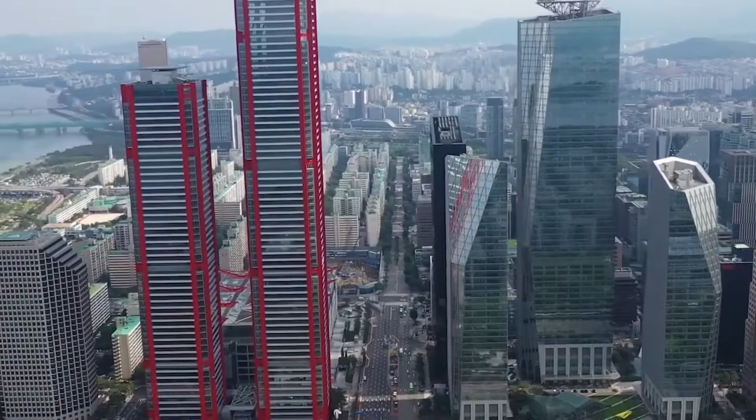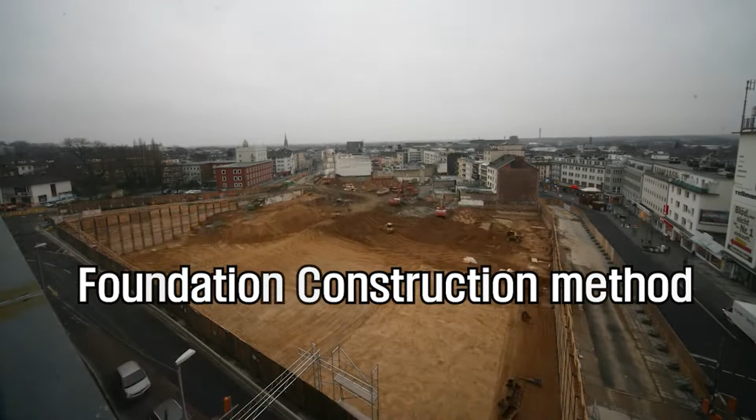Team 2, and this is our Week 8 project about the Hyundai Seoul. We gave a foundation construction method of the Hyundai Seoul last week. This week, we are going to give you the structural construction method. Our topic for this week is Hyundai Seoul's base structure and core.

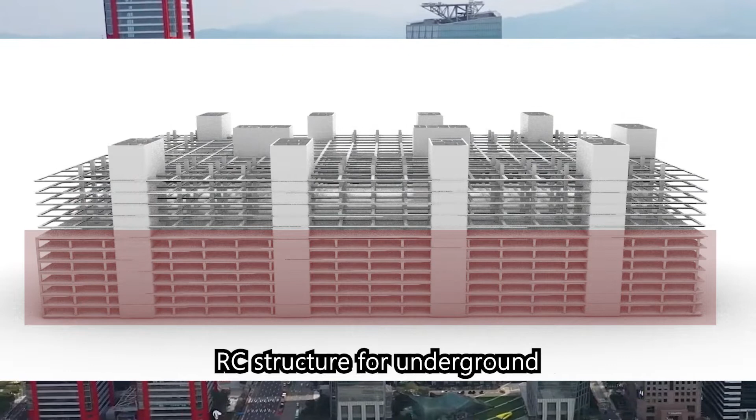The Hyundai Seoul's framework is largely divided into two sections: the reinforced concrete structure for underground and the steel structure above ground. First, let's look at the RC structure underground. The 7th floor to the 2nd basement floor is a flat slab structure using reinforced concrete because of its economic feasibility.

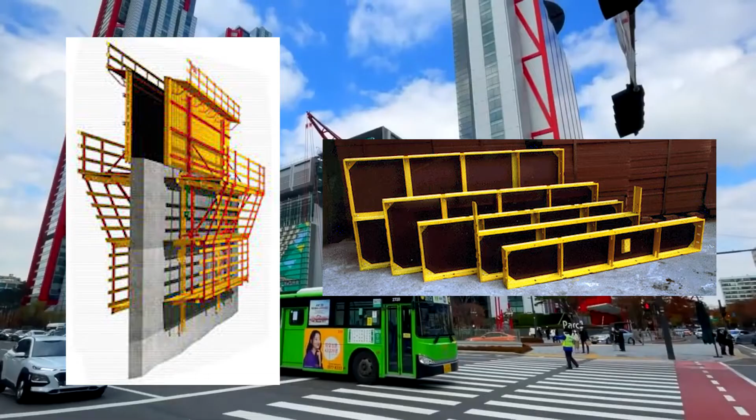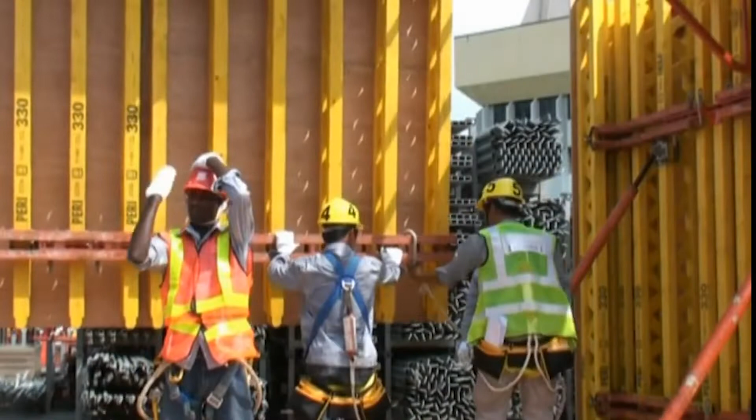The structure consists of an 8.4 meter square grid unit with beams and columns, and the concrete was placed using the system formwork method and the Euroform method. System formwork refers to a form that integrates, unitizes, and enlarges the formwork in advance along with the supports that reinforce it. There are many advantages in construction management, such as securing the precision of the frame construction and shortening the construction period through construction simplification.

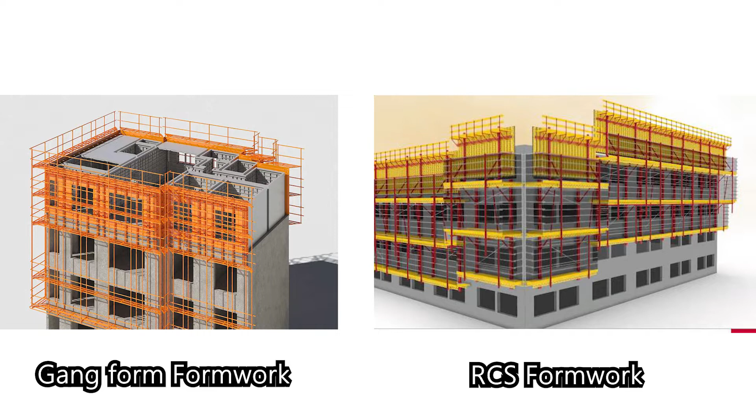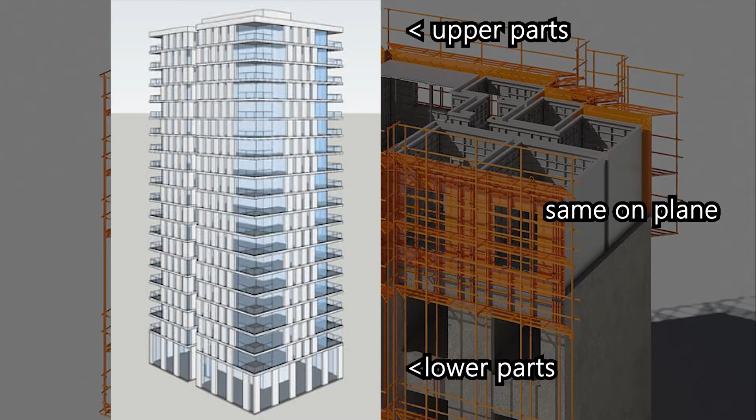In particular, gang form formwork and RCS formwork were used in the basement construction of the Hyundai Seoul. Gang form refers to a large formwork made by integrating an outer wall mold and a scaffold cage in a cross-sectional structure with the same upper and lower parts on a plane, such as in high-rise apartments. RCS is a working scaffold for wall formwork, an integrated rail system that combines the working scaffold for formwork installation, the scaffolding frame, and the finishing scaffolding after placing concrete.

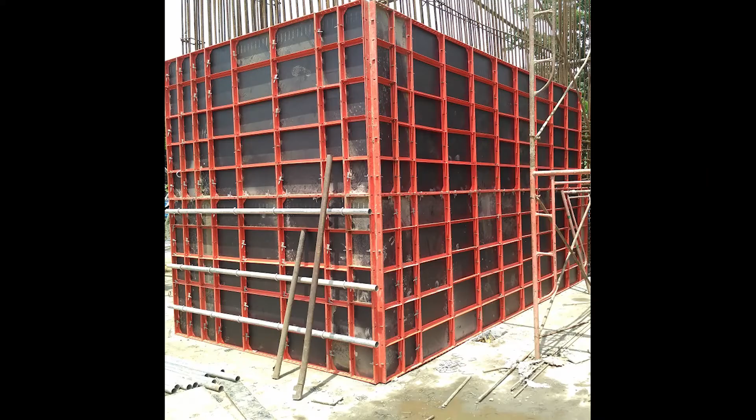The Euroformwork system is a standard form in Europe, and it is the form most commonly seen in the domestic field. Usually 600 by 1200 mm is the basic dimension, and there are several types by size. The spacing of the steel frame inside the form is 300 mm, and the wedge pinhole for assembling or bonding between forms is drilled every 150 mm.

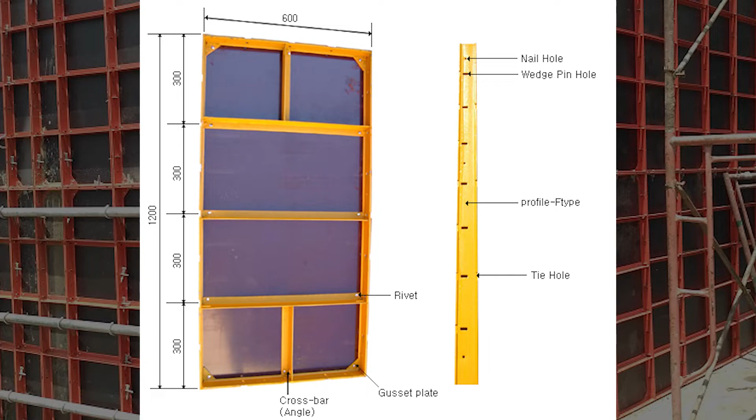This RC structure uses high-strength rebars, and an economic evaluation was conducted to select the appropriate rebars. This resulted in the use of high-strength rebars of SD500 above D13 and SD600 above D16. In addition, concrete combination tests were conducted directly at the construction site, and the proper specifications were selected for the environmental conditions.

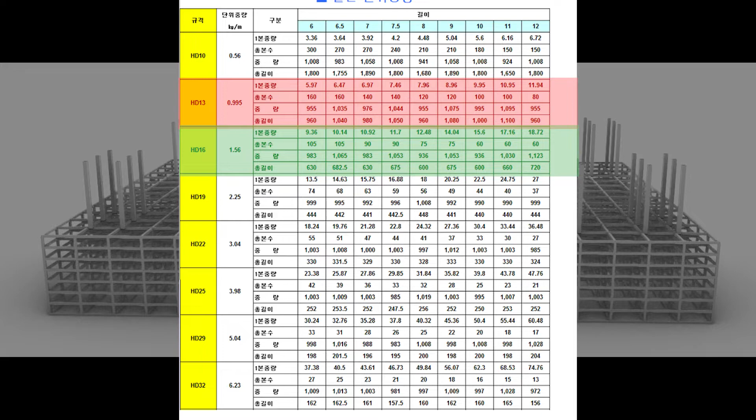As the construction of the basement floor proceeded, the core walls were built at the same time. A total of 11 cores were constructed one floor earlier than the slab layer by using the gang form method. Next, let's look at the structure on the ground.

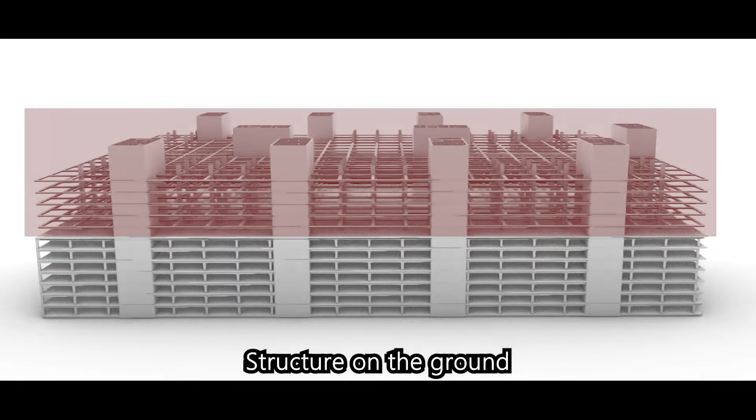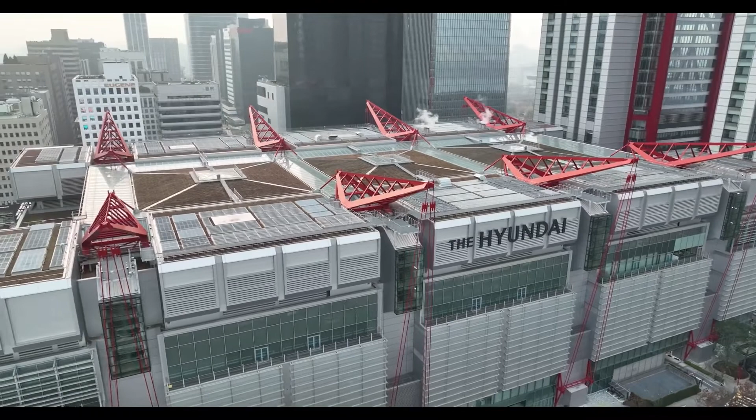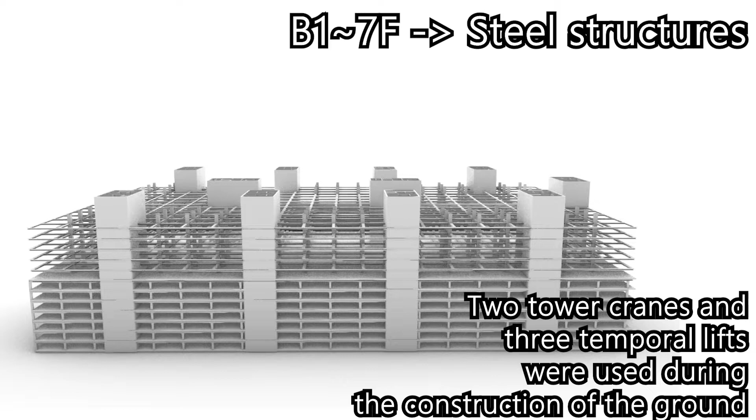The ground floor of the Hyundai Seoul consists of 8 cores and a steel frame, and a large steel structure is installed on the roof to realize an indoor space of 50 by 50 meters. The first basement floor and the ground structure were constructed with steel structures. 2 tower cranes and 3 temporary lifts were used during the construction of the ground floor and remained to transport material until the 3rd floor structure was completed.

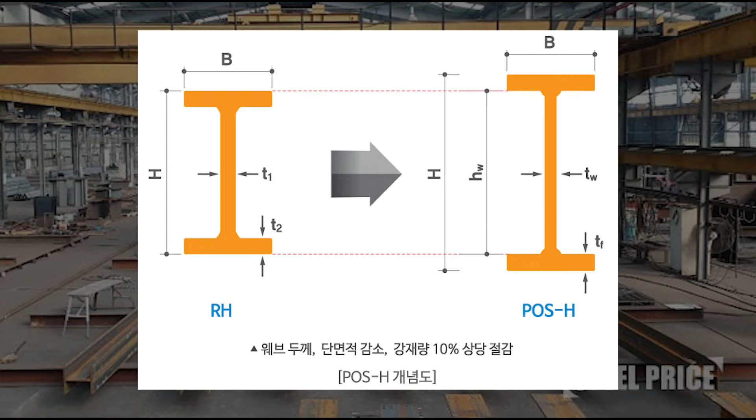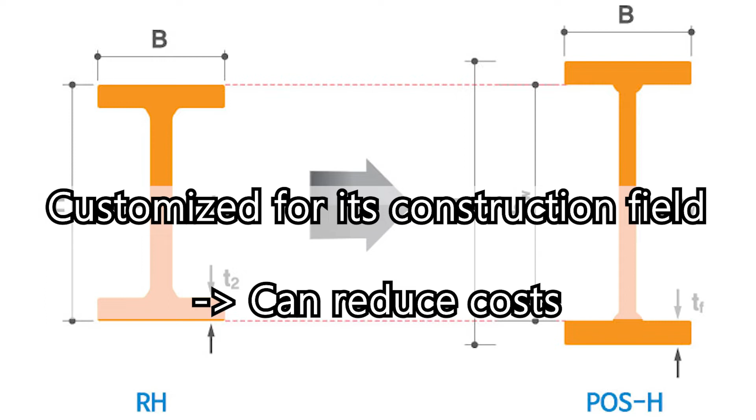In general construction, rolled H-beam is commonly used for steel structures, but in this project, a special steel frame called POS-H, developed by the constructor POSCO E&C, was used. Unlike a conventional standard H-beam, this POS-H can be customized for its construction field, so it can reduce costs since the constructor can use the exact size they need.

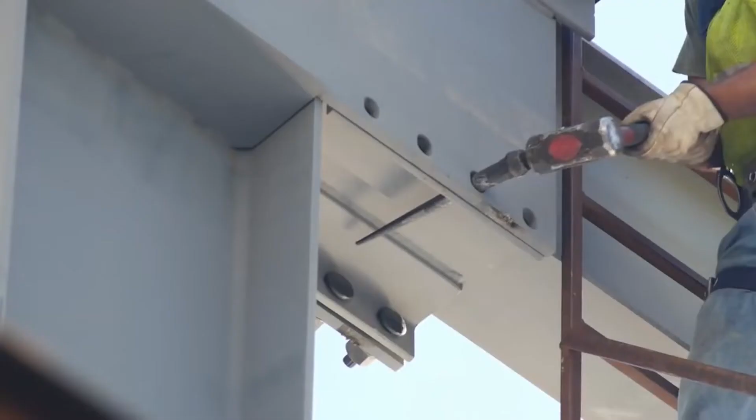In particular, the beams were designed as hybrid beams through collaboration with the KSSC. The flange part of the beam member was designed with high-strength TMCP steel, and the web part was designed with general steel. On the other hand, various methods of bolting and welding were used for joining steel frames.

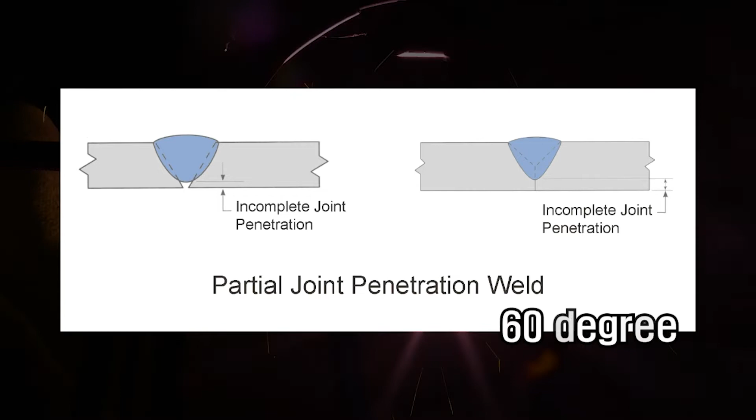For general members, bolting was used to shorten the construction period, and welding was used for large members that could not ignore construction errors. Especially for welding, the angle of PJP was 60 degrees before the suspension of construction, but it was changed to 45 degrees through WPS, saving welding time and cost.

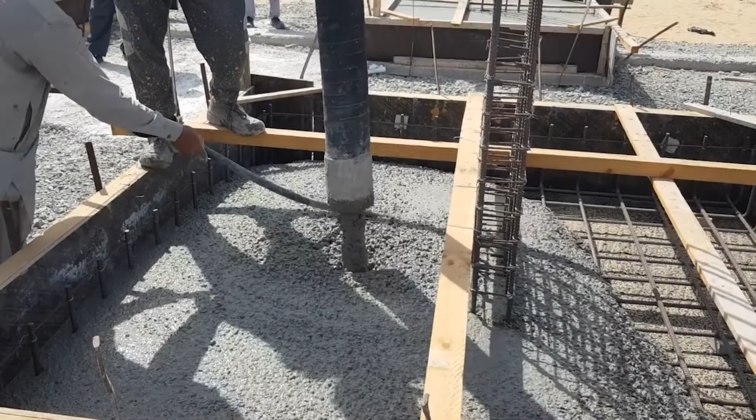As we can see, the structural methods of the two sections are different, so the transfer girder was required to transmit the load on top to the lower structure. The thickness of the transfer girder is very thick, 1 to 2 meters, so there were some cases to divide the pouring section, for example when the amount of ready-mixed concrete is insufficient, or the load needs to be divided.

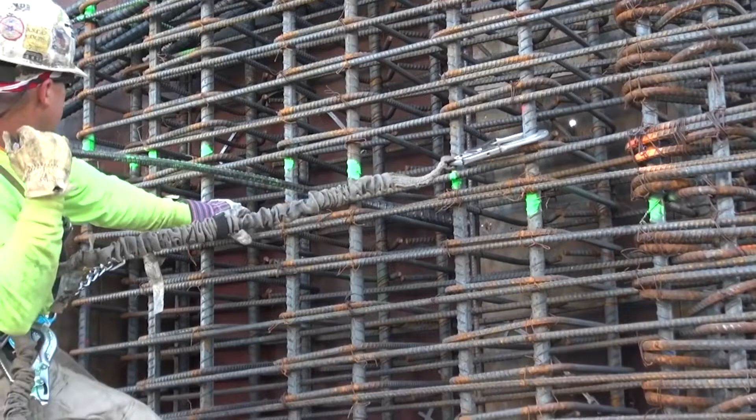In order to connect two successive pours, a shear connector should be added. In the construction, a number of small rebars of D10 and D13 were installed to ensure structural stability. We will cover more details at another time.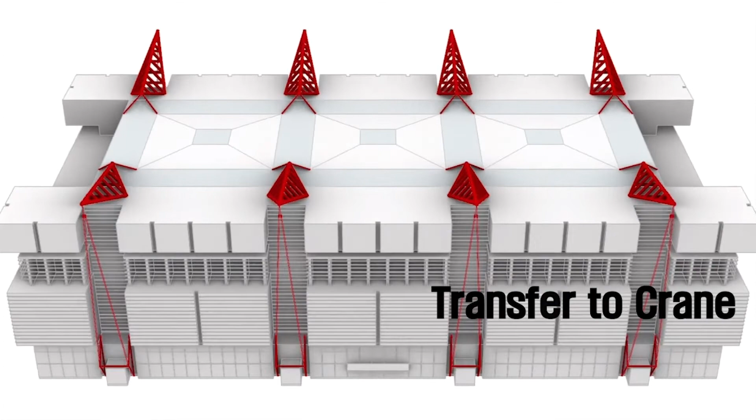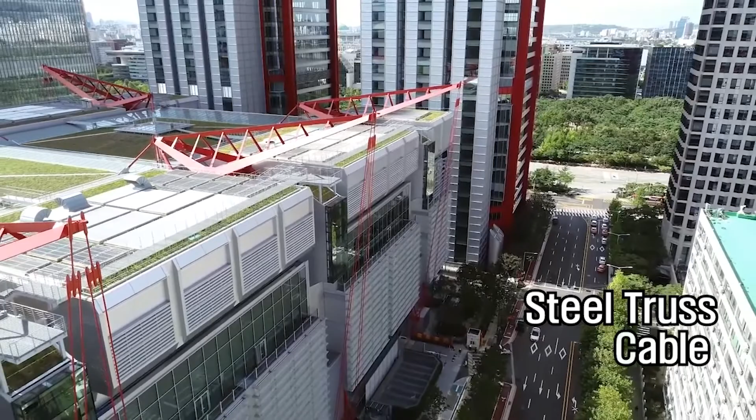The load of the large steel structure on the roof is transferred to the crane, and is designed to transfer from the crane to the podium, and from the podium to the retail core wall. At this time, a steel structural truss and cable were used to support the tensile force of the large structure, and the load was designed to be symmetric while matching the direction, so that the load was transmitted effectively to the core.

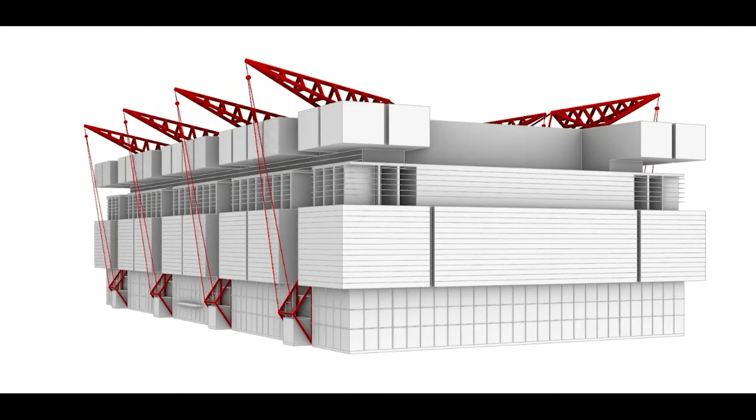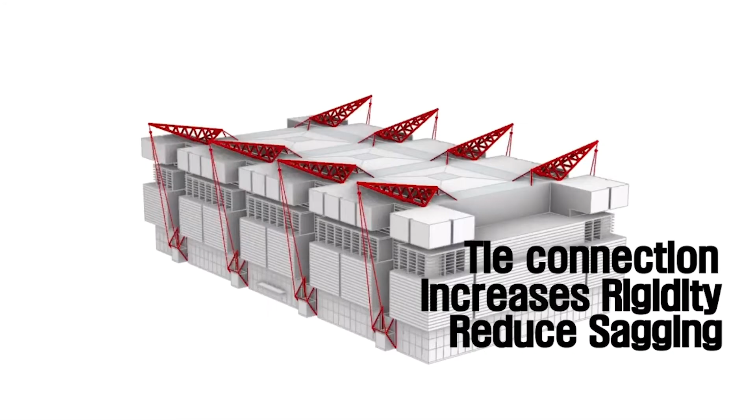In addition, the tie connected to the retail core on the crane increased the rigidity to reduce the sagging of the end arm on which the kite is hung, and also to reduce the vertical movement in response to horizontal load.

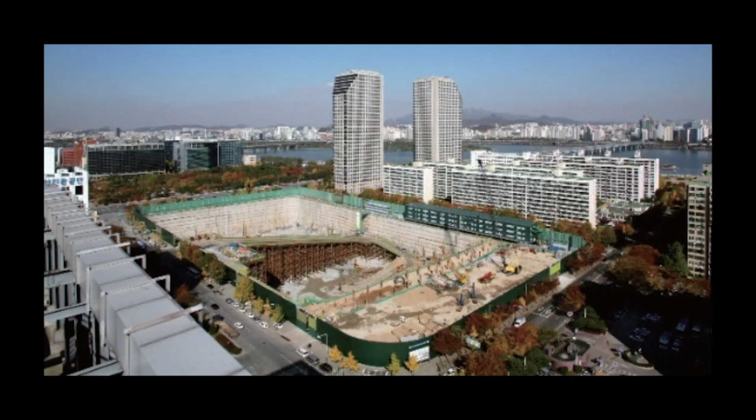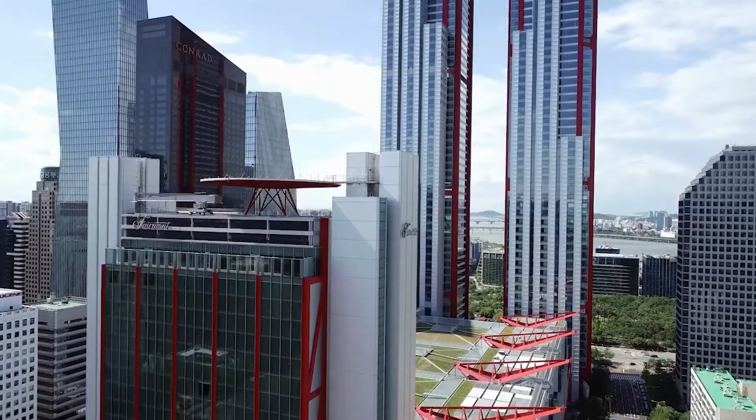Most of the underground structure of the Hyundai Seoul was originally completed by Samsung C&T, the constructor before suspension, but the design was changed as the constructor was changed. The main reason was that Hyundai department store participated in this project.

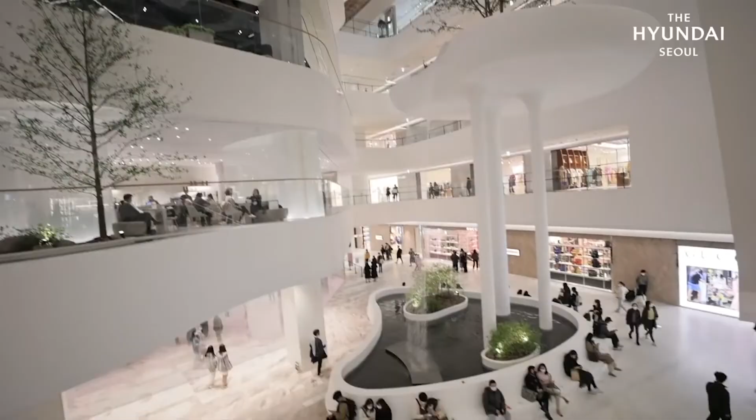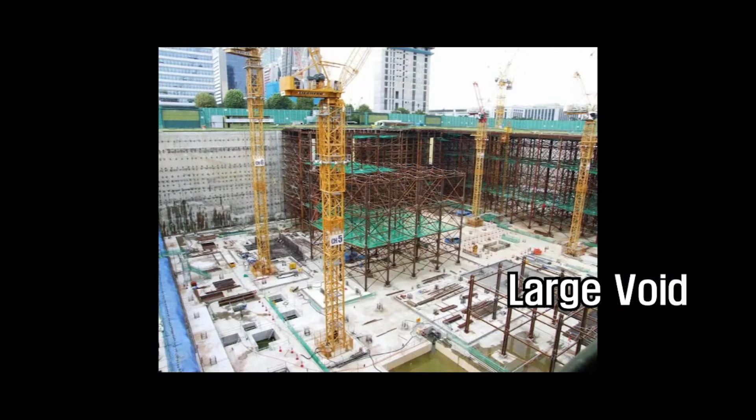According to the original design plan, the retail section of Parc.1 was designed as a shopping mall, not a department store. Unlike the general design of a department store, there was a large void on the first floor connected to the basement, and the column gap was narrow, so retail stores were open in between.

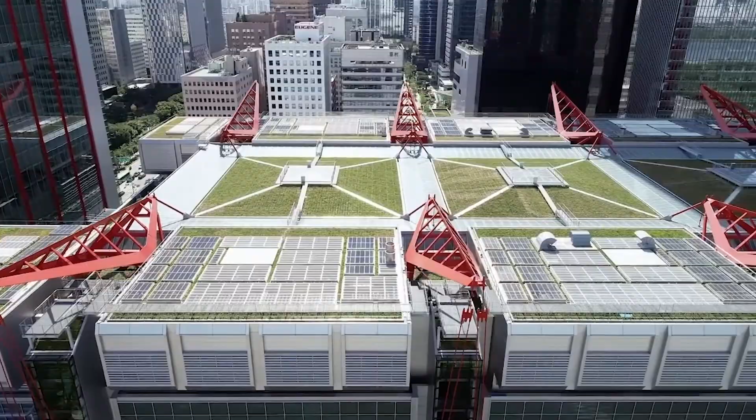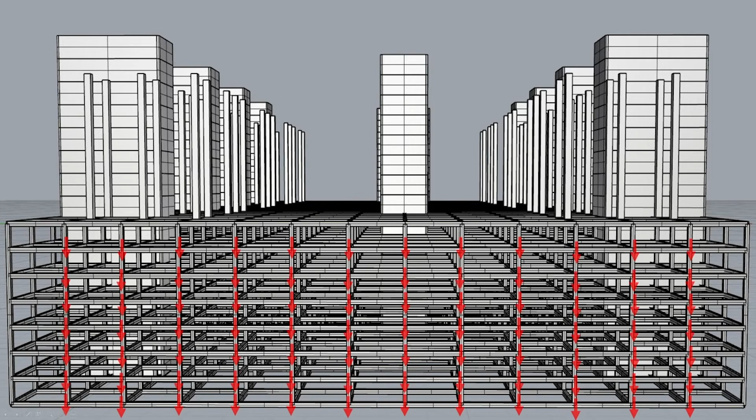However, as construction resumed and the department store came in, the design was changed, filling the first floor void and adding beams to the second basement floor to reinforce the load. This is because when the food hall enters the first basement floor, it needs to be separate from other floors due to hygiene problems, and when kitchen facilities were installed, the load increased, so stability was not secured by the existing design.

In the next week, we will talk about the steel structure of the ground floor, the biggest feature of this building. Thank you for listening.